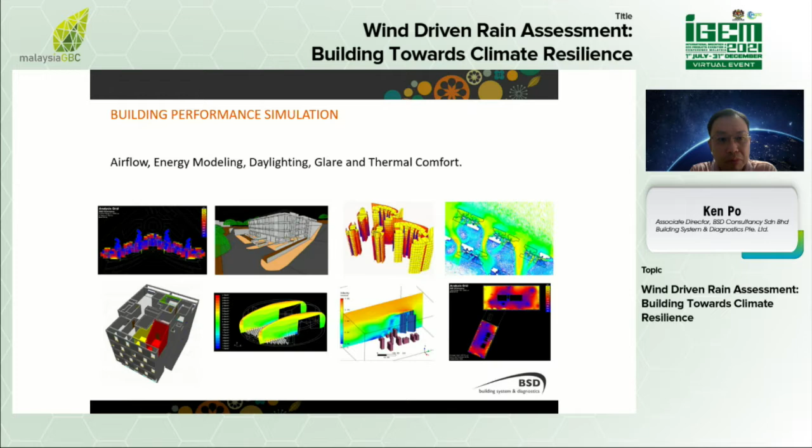Other than green building certifications, we do a lot of building performance simulations, including CFD simulations, energy modeling, daylighting simulations, solar and shadow simulations, etc.

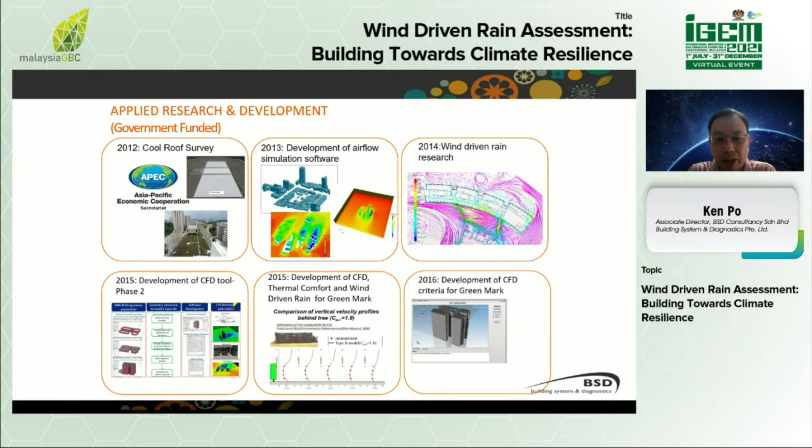Over the years, our company has been actively involved, teaming up with governments to conduct different research projects, such as rooftop gardens in 2007, cool pavement coating in 2008, and working with Singapore Building and Construction Authority BCA to develop CFD simulation methodology, wind-driven rain simulation methodology, and thermal comfort criteria.

We have offices in Kuala Lumpur, Singapore, and Beijing, China.

For buildings, especially sheltered areas, because the area is sheltered, by right, it should remain dry even in the event of raining.

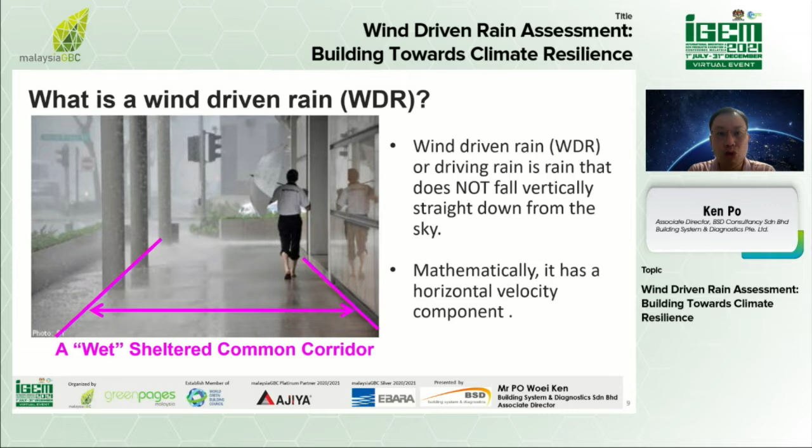Before I start the presentation, I have a few videos that we would like to play. Due to the lag, I have the organizers help me play the videos, and then I will do some explanations. Please help play the video, please.

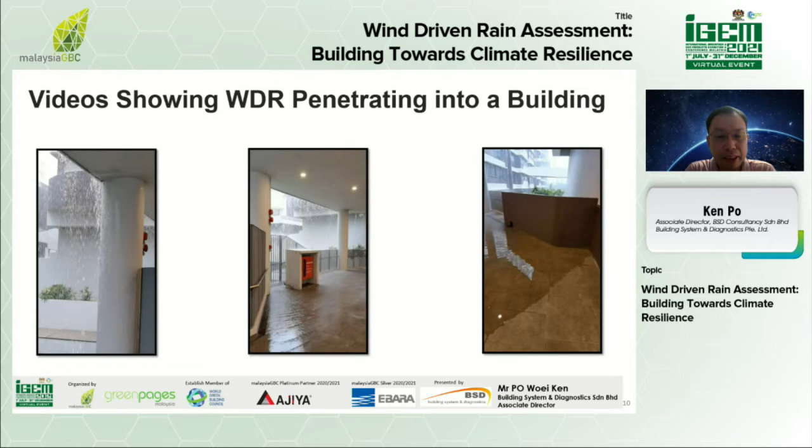I think I'll need to stop sharing. Right. Yes.

Okay, so in this case, you can see that there's rain penetrating into this commercial linkway area.

I think there are a few more videos, please help continue playing that. Okay, so this is another zoomed-in angle. You can see there's a lot of rain penetrating into this area, and gradually there is ponding happening.

Even though at the edges of this sheltered walkway there is a scupper drain, the drain is not sized adequately, and partially it's because there is some blocking of the scupper drains, so the ponding gets more and more serious, right? So these are the three videos I would like to show you guys to illustrate wind-driven rain and how it impacts the building. Okay, let me share my screen again.

Typically the traditional facade treatments that go with a building to protect it from direct rain penetration normally include awnings, retractable awnings, fixed horizontal overhangs, vertical drop panels, or louvers. So these are the typical types of facade elements.

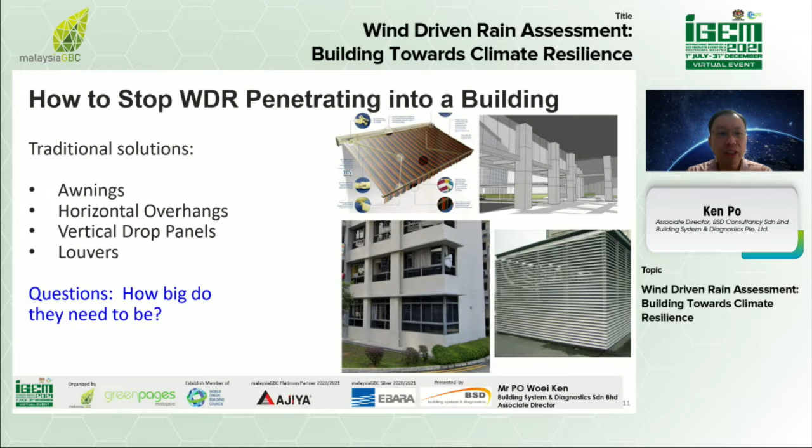Before computer times, in building industries or in built environments, if we wanted to get some sort of airflow or wind flow solution, we would have to do wind tunnel testing. Now for wind-driven rain types of study, that means to really find that out, either we have to build a mock-up, or in wind tunnel testing, we have to spray some water to create a raining environment to find out the rain penetration.

There are very little wind tunnels that would allow you to spray water droplets inside the tunnel. Normally wind tunnels remain dry, and the goal of that wind tunnel is mainly just for wind study, not for rain. It's very expensive to conduct wind tunnel testing. There's not a whole lot of wind tunnel facilities.

In, say, Malaysia or Singapore, probably only a few universities have such wind tunnel models, and they might not even open that up for the public to use or for businesses to do experimental testing. So doing wind tunnel testing is not that feasible.

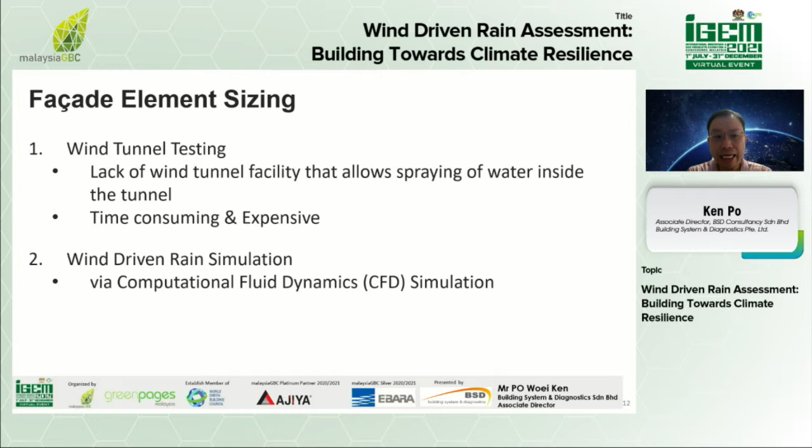So the next best solution to that is to use computational fluid dynamic simulation, or CFD simulation in short, to conduct this wind-driven rain study. And that's primarily the focus of today's talk.

Before I go further, I just want to briefly talk about CFD, computational fluid dynamics. It is actually a branch of fluid mechanics that studies fluids in motion. The first word is computational, so obviously it's computer based—you're using computers to crunch the numbers to find the solutions.

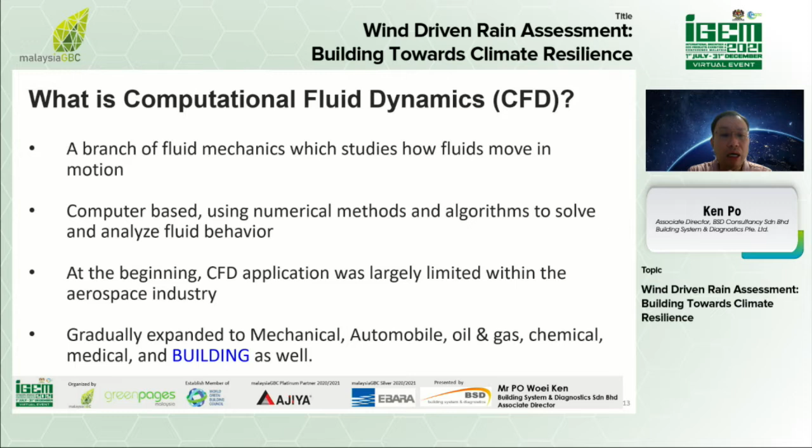At the beginning, CFD was used primarily in the aerospace industry, starting in the 1960s, 70s, used by NASA. NASA has a lot of CFD codes to calculate the aerodynamics of airplanes. Gradually, the use of CFD expanded to other industries, including mechanical, automobiles, oil and gas, chemicals, medical, as well as building industries.

In automobiles, in F1, they run a lot of CFD to optimize those fins and spoilers on the F1 car, so that if you turned the F1 vehicle upside down, it would be able to stick on top of the wall, because there's so much downforce generated by those fins or spoilers on an F1 car. That's why F1 cars can make such a tight turn at such high speed—there's so much downforce, and therefore the tire has enough grip to make such a tight turn.

So there are applications of CFD in the automobile industry, and in oil and gas, for all the pipes where oil is being transported, they also use a lot of CFD to do engineering calculations. In the medical industry, for blood flow inside our blood vessels and so on, nowadays the medical industry uses a lot of CFD to help with the study.

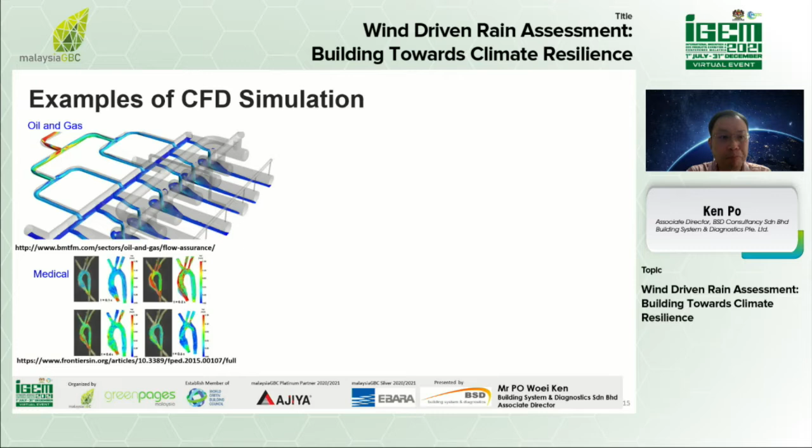So we now come back to building industries. For building industries, we mainly try to use CFD as a tool to find out the motions of wind flow surrounding and inside a building. So the primary outputs we get from any CFD simulations related to buildings would be wind velocity, pressure, and temperature.

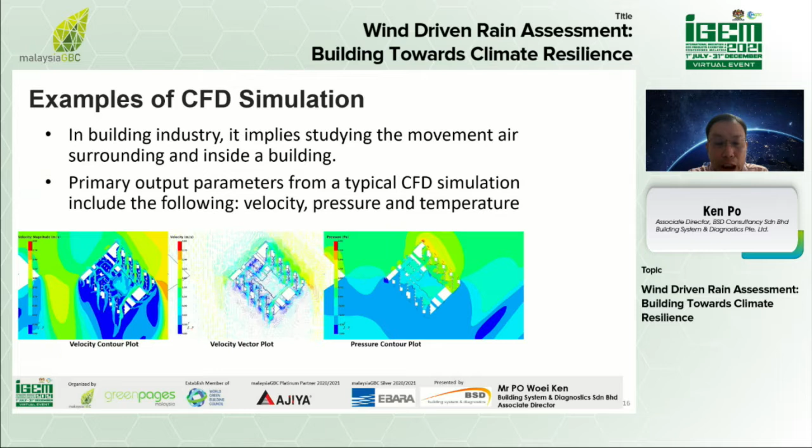It is not to say that CFD is only good for natural ventilation performance calculation. It is not. But in Malaysia and Singapore, in the tropical countries, it is a fact that we use CFD simulations heavily to help improve the natural ventilation performance, or NV performance, of a building, especially if the building is targeting higher green awards, say Green RE Platinum or, in Singapore, Green Mark Platinum. Then it is a prerequisite to conduct CFD simulations to make sure that the natural ventilation performance meets certain passing criteria.

But it is not to say that CFD is only used for natural ventilation applications. We use it for mechanical ventilation study too. For example, one application is the hospital. At the rooftop of a hospital, they will have a lot of exhaust fans, say the exhaust fan coming out from the operating theater or from isolation wards. So the discharge coming through those exhaust fans, we can use CFD to find out if the discharge would or would not recirculate back into the hospital building air intakes. That's why we can use CFD to help us find that out.

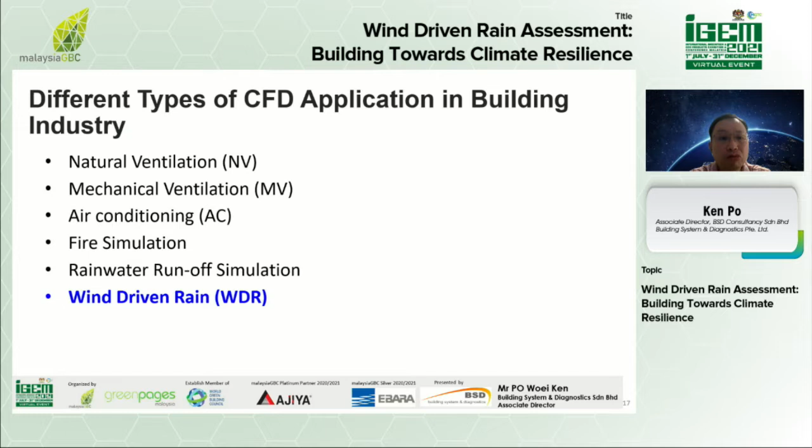For air conditioning CFD, we use that for clean rooms, for pharmaceutical clean rooms, for data centers. There are classic examples of air conditioning CFD simulations. If you are a fire safety engineer, then you would do fire CFD day in and day out, and submit the results to, in Malaysia, the Bomba, or in Singapore, the FSSD, for submissions. Rainwater runoff simulation is something that can also be accounted for. But our main focus today would be primarily on wind-driven rain simulations, WDR, short form WDR.

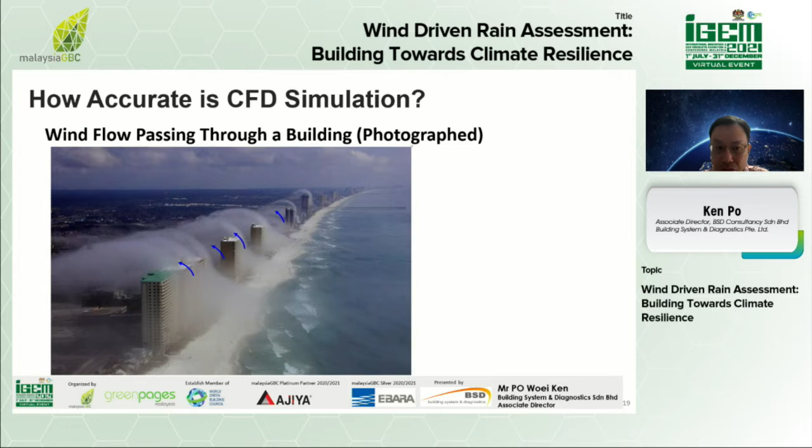Here, the next slide is basically also from the internet. It's a photograph of how the clouds, or the wind, flow past a high-rise building. So you can see that this is very close to the experimental results.

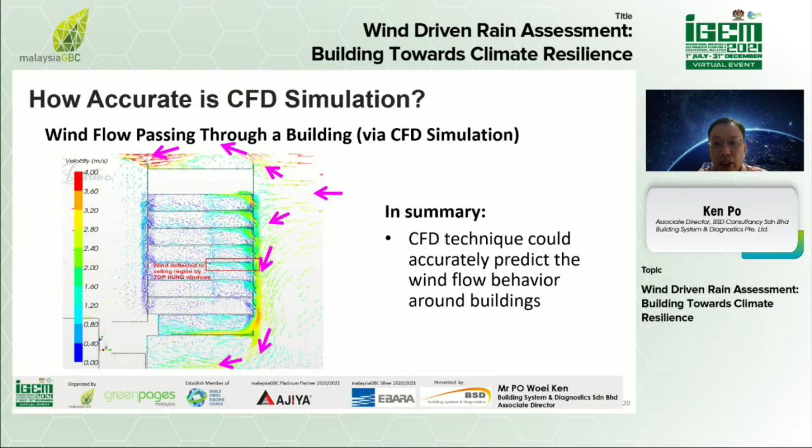Okay, so the objective of this talk today is basically to help quantify the following at the sheltered spaces.

Our focus is mainly on sheltered spaces, because by design if a space is sheltered, there should not be any rain penetration—it should remain dry during raining time. But in the event there is wind-driven rain penetration, using these wind-driven rain simulations we will be able to quantify the depth of penetration.

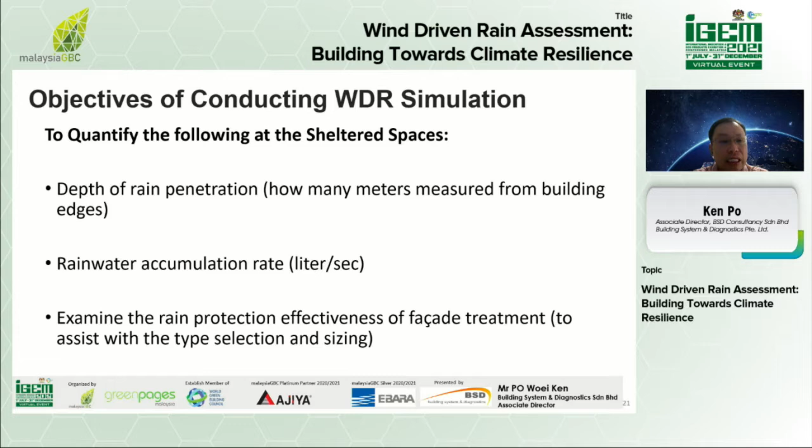From here, we can calculate and estimate the rainwater accumulation rate, which helps with the sizing of the scupper drains or cut-off drains. We can also look into cases where your base design does not produce satisfactory results and you want to incorporate certain facade elements. Using wind-driven rain simulations, I can examine the rain protection effectiveness to see whether there is a reduction in penetration depths, so on and so forth.

All right, so here I'll talk briefly about the methodology that goes into a typical wind-driven rain simulation.

Say I have a set of buildings—that's my main development—located in certain areas with surrounding buildings. Whether it's a natural ventilation CFD simulation or a wind-driven rain simulation, because we are modeling the oncoming natural wind, we have to account for the presence of existing surrounding buildings. So in the 3D CAD geometry, we are not just generating the 3D CAD model of your own development, but also accounting for the presence of surrounding buildings.

Step number two is for typical wind-driven rain simulations: you have to basically first run the natural ventilation simulations, the one I talked about. You have wind coming in from certain directions at a certain wind speed, and that wind speed is expressed as a return period. So I'm introducing this term called return period.

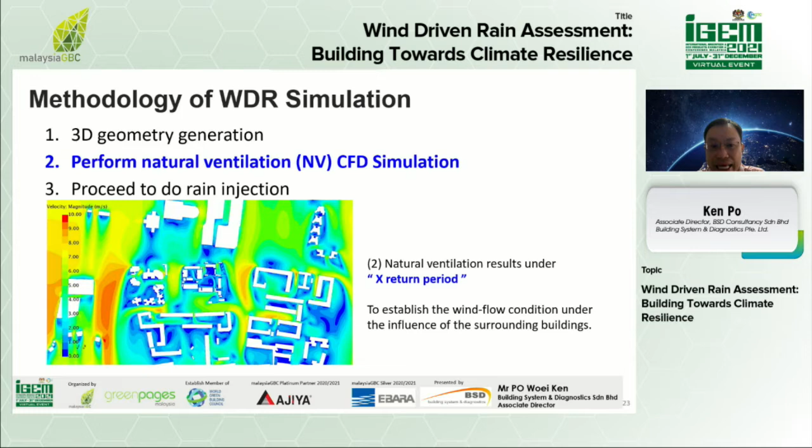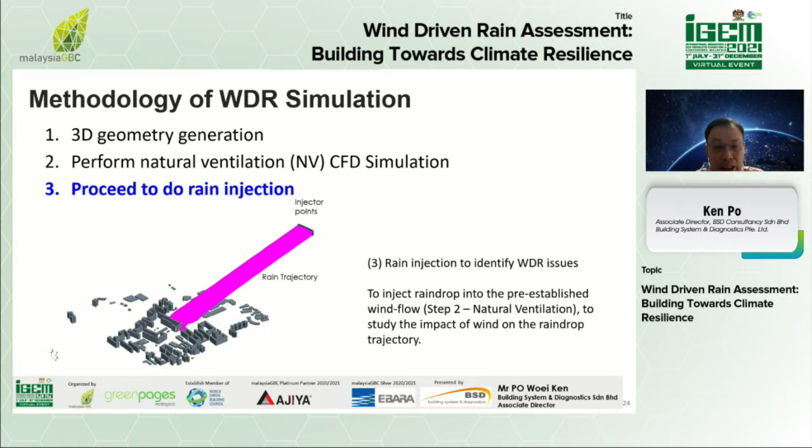So from here, once we get these NV simulation results, we can then go to step 3: injecting the raindrops. From an established natural ventilation simulation result, we will then manually inject a bunch of raindrops so that they fall right on the buildings we are analyzing. We don't really care if the raindrops fall on other surrounding buildings, because that's not our area of concern—we mainly focus on the raindrops falling right on top of our buildings of interest.

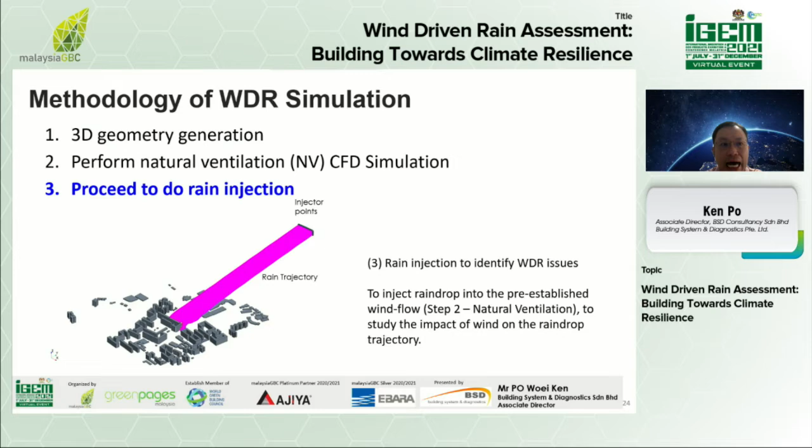So in a few slides these are the basic methodologies introduced at a high level. Then I'll go into the more detailed aspects of that.

So you might ask, okay, we have to account for the presence of surrounding buildings, I got that, but what is the extent of size you have to account for? Using this as an example, in the middle is a private condominium development. If I draw a line connecting the longest distance across this particular development, say the reference length is 168 meters as an example, then the presence of surrounding buildings, based on the current GreenRE CFD simulation methodology, has a radius of 3 times the reference length. So the diameter would be 6 times the reference length, and that's about 1 kilometer.

So this diameter is about 1 kilometer in size, and that is the extent of surrounding buildings that you would need to account for. By doing that, the simulation results can be considered accurate and realistic. So in summary, the radius is 3 times the reference length.

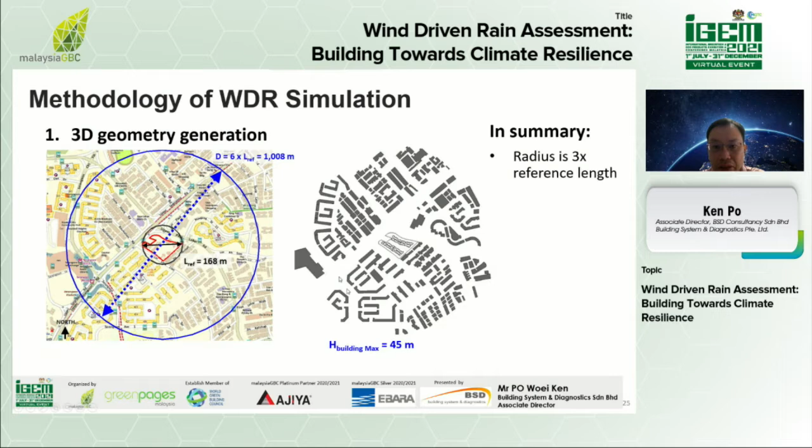This shows that right in the middle is the development. So we can either include surrounding buildings 3 times the reference length, or we can include the presence of surrounding buildings 500 meters north, south, east, and west. This 500-meter extension is in the Singapore Green Mark standard. So based on the location of the project, and based on different criteria, you can adopt either the 3-times reference length or the 500-meter extension.

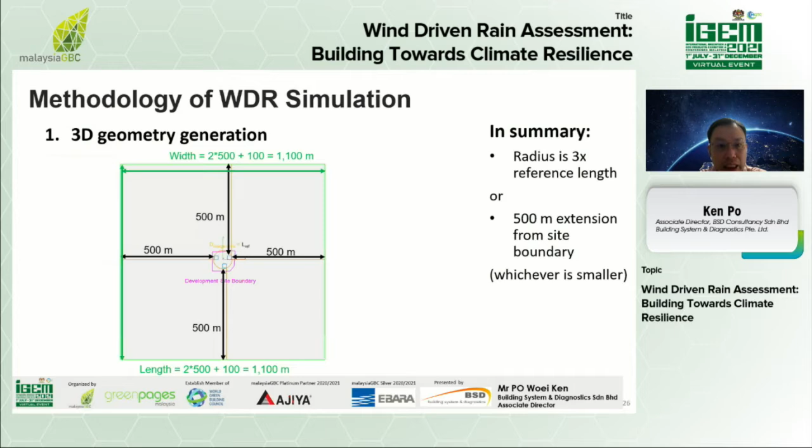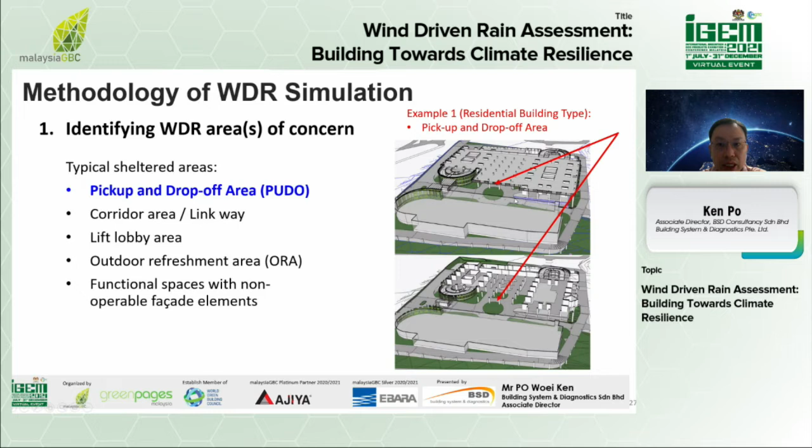Basically, in Malaysia, there are lots of condominiums that on level 1, or ground level as it's called in Malaysia, have the pick-up and drop areas. Then you have a few stories of multi-story car parks, and your residential blocks are located on top of these car parks. So this pick-up and drop area, or PUDO area, is typically an area of focus for wind-driven rain study.

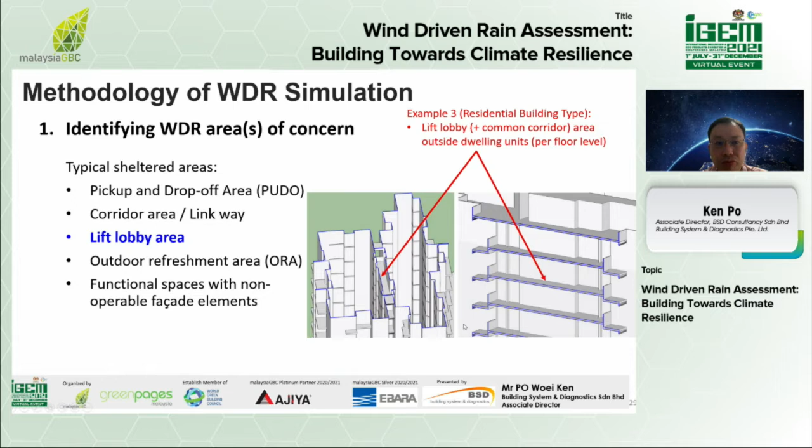So it's not stuffy, which is very good for normal day situations. But in wind-driven rain situations, we need to make sure the facade elements are adequate. For example, in these cases there is a horizontal RC canopy, and on the outer edge of that canopy there are vertical louvers. We need to check whether these combinations of facade treatments give good enough protection to this lift lobby area.

For commercial buildings, say with some outdoor refreshment area, like Starbucks or those kinds of dining areas, it is sheltered definitely. Those with outdoor refreshment areas are sheltered, but because they're located very close to the edge of the building, during raining time, would rain penetrate or hit those ORA areas or not? So this is another example on the commercial building types.

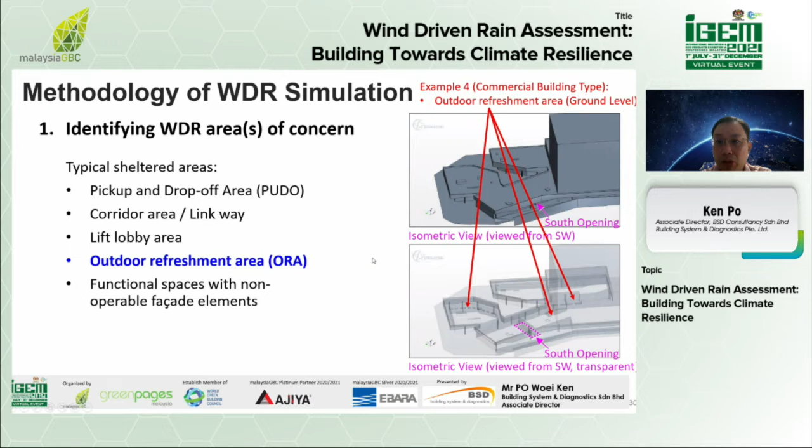Lastly, for an industrial building, say a naturally ventilated industrial building type, inside my production areas or functional space, these industrial buildings have fixed, non-operable facade elements. It might feature either a single bank louver or a double bank louver, so it's not operable, it's fixed. Then the next question is, would rain penetrate into my production area?

So you can see that in all these different areas of concern, I did not mention anything about residential dwelling units. First of all, residential dwelling units feature operable facades and windows, either casement, sliding, top hung, or conventional louvered windows, so they are operable. Secondly, because they're operable, the tenants or people staying in the dwelling units, during raining times, will go to the windows and close them up to make sure rain doesn't penetrate. So all five typical areas of concern that I've highlighted deal with something that is fixed, facade treatments or elements that are all fixed.

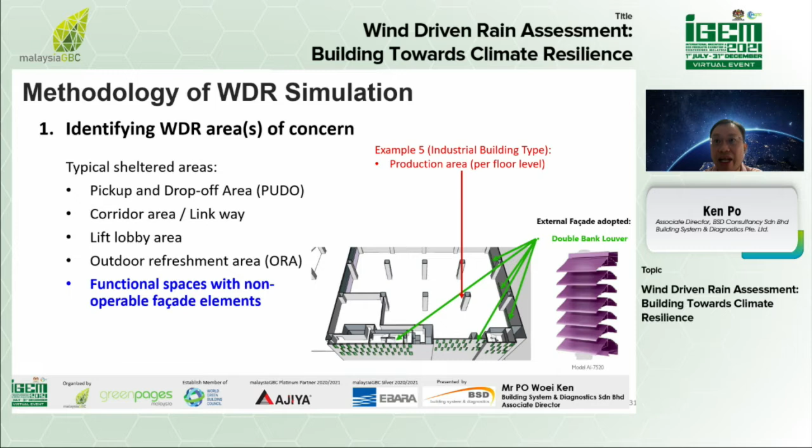So you cannot really improve the rain protection effectiveness. Realistically, a wind-driven rain simulation is more applicable to those areas that have fixed facade elements. If you do have an active system, say at the switch of a button the louver angles can be adjusted, or the windows can be mechanically controlled to close at the push of a button, then an active system would be the best solution. If you do have an active system installed or provisioned, then you are right, you do not need to conduct wind-driven rain simulations. The primary reason we do this simulation is because most buildings would not have such an expensive active system.

Okay, so the next thing is, after identifying the areas of concern, the next question is what wind directions and what wind speed magnitudes you are going to prescribe in your simulations. For Malaysia, in Kuala Lumpur as an example, depending on your location in the Klang Valley, you would either choose the Subang Airport weather data or the KLIA weather data. If you have a project in PJ, Subang, or even in downtown KL area, say Bukit Bintang, Subang Airport is actually located closer compared to KLIA.

And therefore, you should always choose the nearest airport. So this is what we call a wind rose. I break it down into 12 different months, starting from January all the way to December. So what it says is a wind rose gives us an indication of the prevailing wind directions per month.

In January, you can see most of the winds are coming in from the northwest direction. So northwest, west towards northwest, is primarily the prevailing wind recorded at Subang Airport from January, February, March, all the way to May. In June, we have more south-southeast or southeast winds coming up, that's in June, July, August, and September. Then in September, we have more northwest wind coming back, September, October, November, and December again.

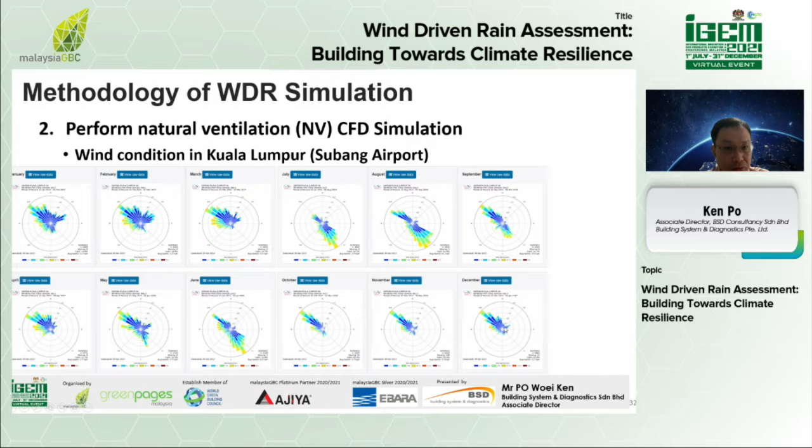So in summary, if we were to plot an annual wind rose of Subang airport, we can basically conclude the prevailing wind direction is northwest with an annual hourly mean wind speed of 2.09 meters per second. That can be calculated. This is based on a 5-year sample, January 2012 to December 31st, 2016. So it's 5 full years of data.

And the next second most predominant wind direction would be the south-southeast or south wind with an annual mean wind speed of 2.65 meters per second. So if you were to conduct natural ventilation simulations or wind-driven rain simulations for your projects in KL or PJ area, I would strongly advise using Subang Airport data.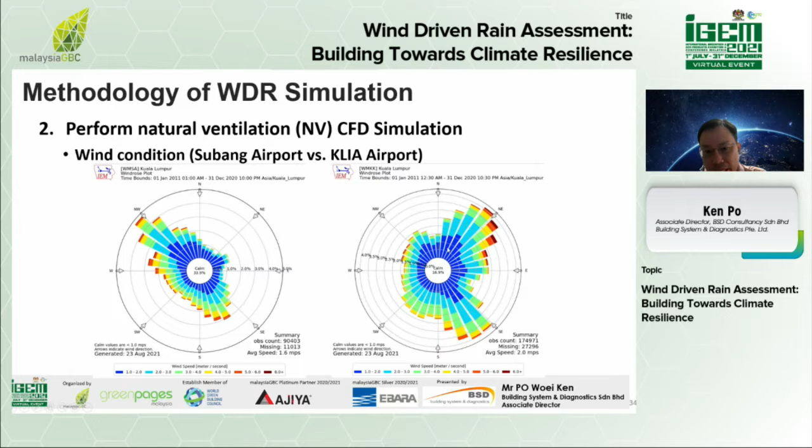Then if you were to have a project, say at Cyberjaya or Putrajaya nearer to KLIA, yes, then you would use the KLIA wind rose data. This one is on the right hand side. So you can see that KLIA versus Subang airport, probably the distance between them is 50-60 kilometers apart. But you can see the wind rose is completely different. For KLIA, the predominant winds are northeast and southeast, versus for Subang Airport it's northwest and south-southeast.

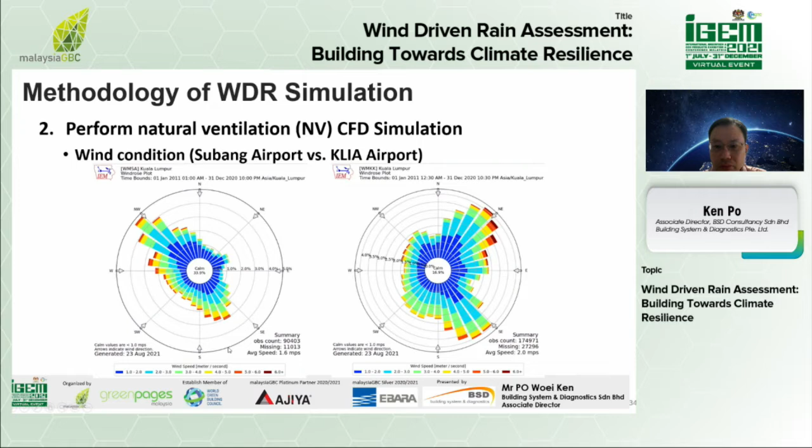So depending on your project site, say at Bukit Pindang area, it's only 20 kilometers away from Subang airport. Well, if you compare that to KLIA, that is about 45 kilometers away. So you will pick the nearest airport. That should be the way to go. And we will always pick an airport wind data.

For different buildings, before I continue further, for different cities in Malaysia, say in Penang, say in JB, say in Kuantan or Kota Kinabalu, KK, you would use the local airport wind data. That would be the best and most accurate way to do the simulations.

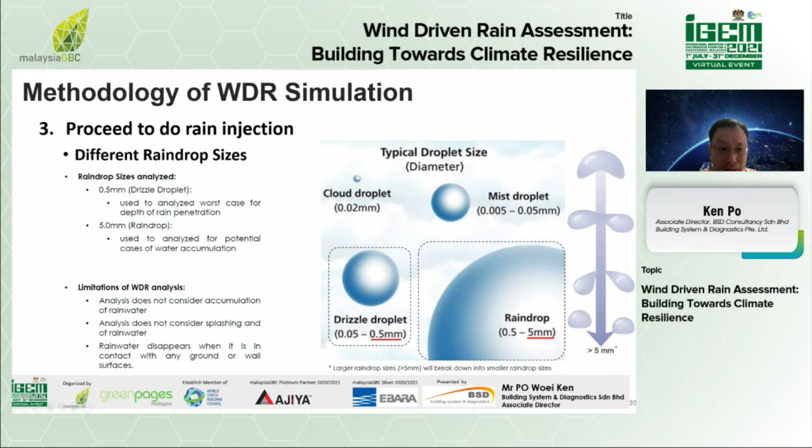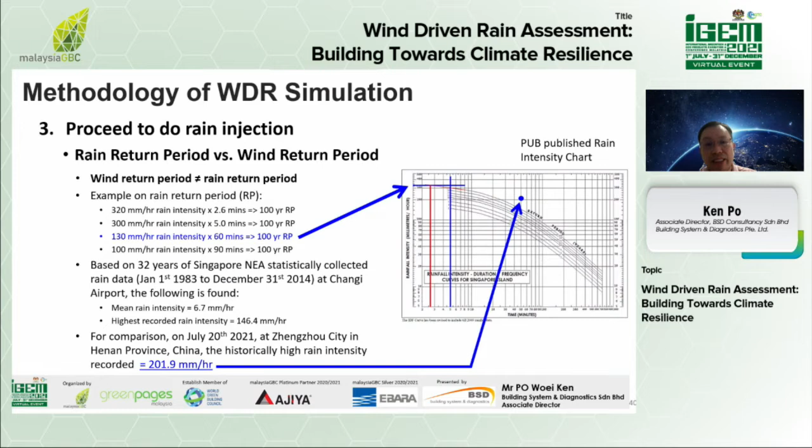So to them, this July 20th rain, that is why the news agencies all call it a 1,000-year return period condition, right? So that gives us an idea how severe that incident really was.

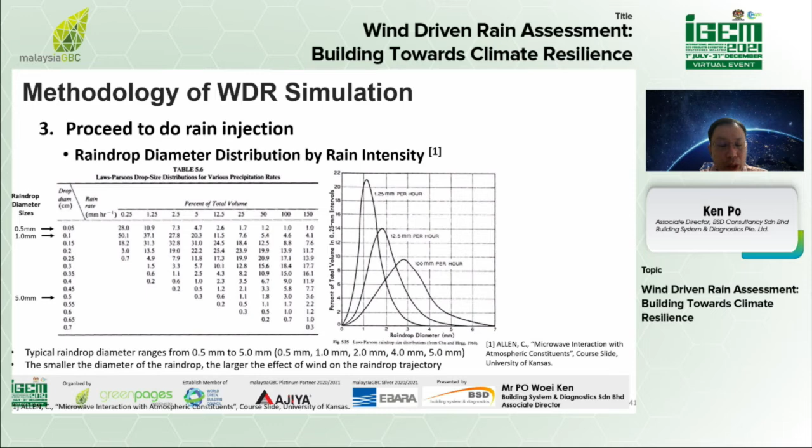I will quickly talk about the passing criteria, or the human perceptions on wind-driven rain results. Now, just now I talked about earlier on that BSD was involved in these research programs funded by the Building Construction Authority of Singapore.

In 2005, that joint multi-party research project aimed to develop natural ventilation CFD simulation methodologies by IHPC of Singapore, thermal comfort criteria by National University of Singapore, and BSD worked on the wind-driven rain simulation methodology guideline and criteria, together with the Eindhoven University of Technology, TUE, from the Netherlands.

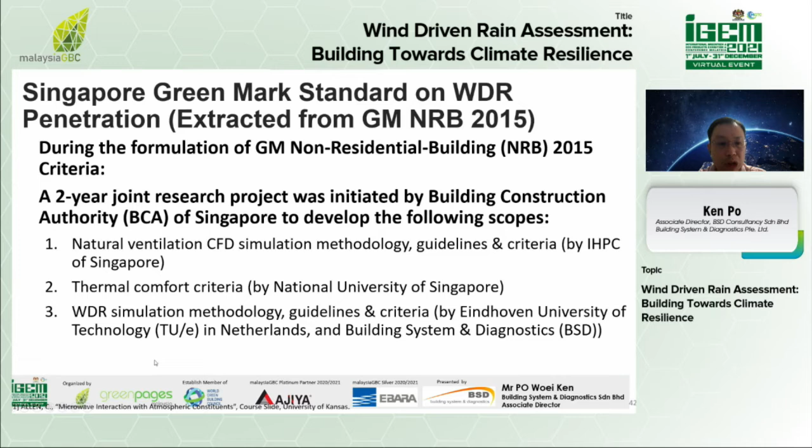So at the end of this 2-year research project, item 3 is what gives the passing criteria of the wind-driven rain study. It focused on different types of non-residential buildings: industrial buildings, healthcare buildings, commercial atriums, hawker centers, sports facilities, and schools—meaning primary and secondary schools primarily, with natural ventilation classrooms.

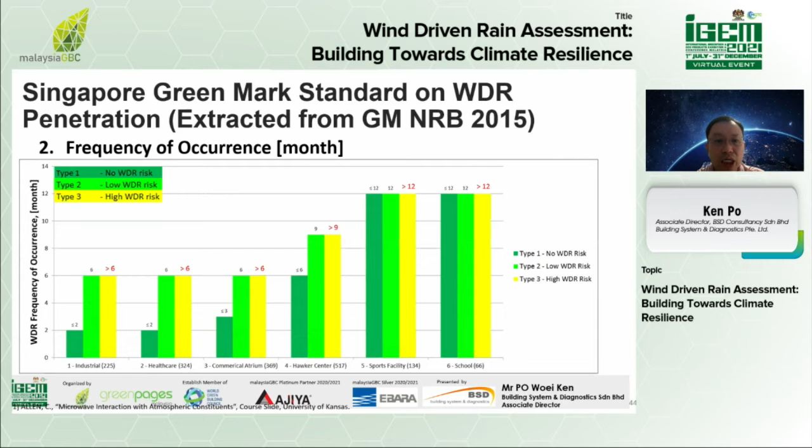Then the frequency of occurrence, you can treat that as the input parameters you will put into your wind-driven rain simulations. Just now we talked about a 12-month return period. For certain different types of buildings, you can use anything greater than a 6-month return period, or for certain facilities it's a 12-month return period, something like that. So the results of that study give us two big results: one is the passing criteria, the other is the input parameters into the wind-driven rain study.

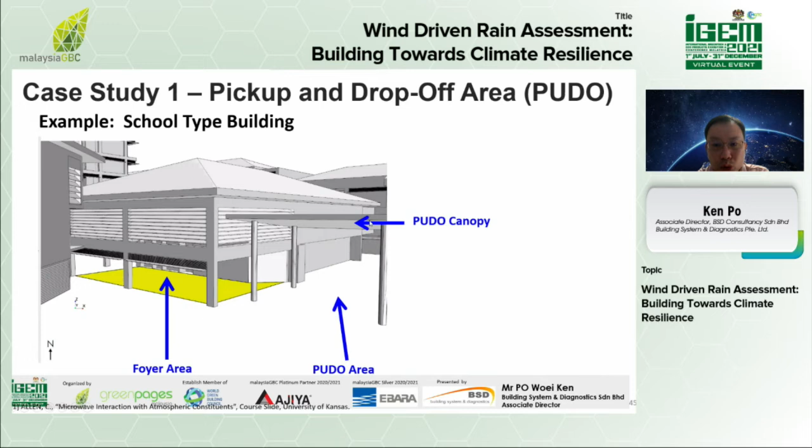I'll give a few case studies on what you can get out from this wind-driven rain simulation. So just now I talked about the Pudo area—I'm going to use these school buildings. That school building has a Pudo area and foyer areas, and you can see that this Pudo canopy is a double volume height.

So we will first do a natural ventilation CFD, and this is the velocity contour plot I talked about just now—dark blue stands for low wind speed. In these 8 different wind directions that we analyze, you can see that under east winds, we have a lot of wind rushing inwards into this foyer area and also the Pudo area, so potentially this would mean there are lots of rain penetrations.

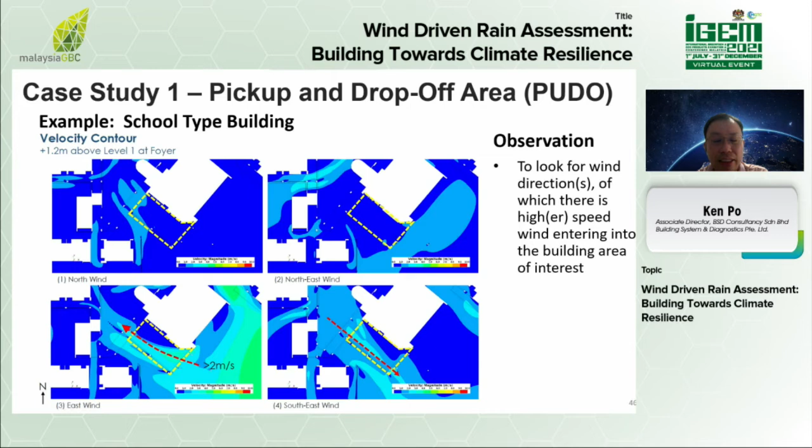And this is for the smallest raindrops, 0.5 millimeter in size. If we go to the largest raindrop sizes, then the penetration depth is very little into the PUDO area. Most likely it's considered acceptable, and there isn't anything into the foyer area.

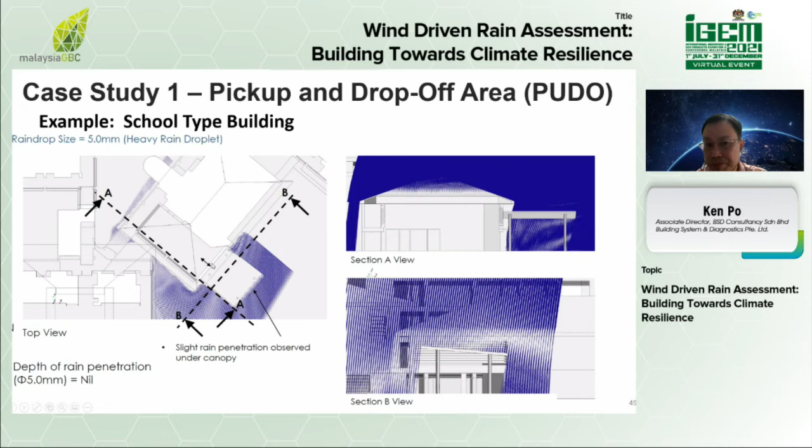Right, for the school, same project, case study 2, focusing on the Linkway area on the right-hand side. If we do a section CC at the Linkway, you can see that at the higher floor levels, typically for school buildings with multi-floor levels, where the wind is stronger, there's a likelihood of wind-driven rain penetration at 31 degrees and 51 degrees penetration angles.

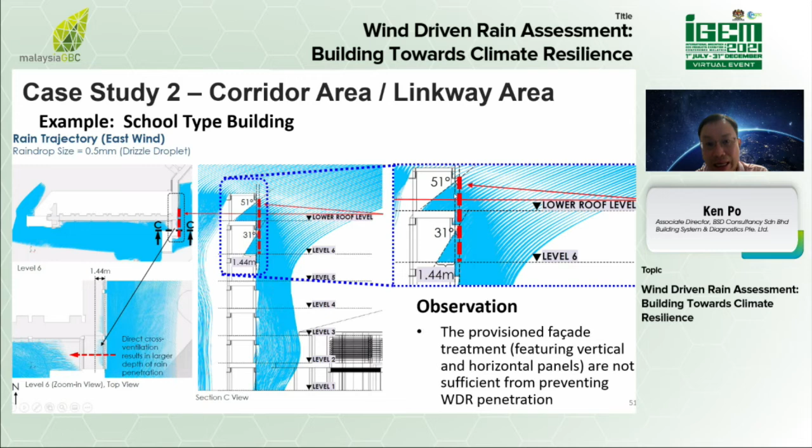So at this lower roof level, pretty much the entire width of this Linkway is wetted, and obviously that is a no-no. If I run this and get this kind of simulation result, this is not considered acceptable to me. Then I would advise the architects that the facade treatments need to be enlarged to give more protection.

Right, for high-rise residentials, for a lift lobby corridor area, at the highest few levels, normally that's where the wind is strongest and you have rain penetration inwards. So this gives us an example. At the highest level, that would always be the most critical floor level with rain coming in.

You can see this rain from the 0.5 millimeter raindrops is actually traveling upwards. So now we are tying this back to the velocity contour vector plots we showed, that near the highest part of the buildings, the wind is traveling at an upward angle, and that is why the rain, especially the very small raindrop size, is also traveling at an upward angle, and it will penetrate into this common corridor lift area, where the penetration depth is very severe at about 9 meters.

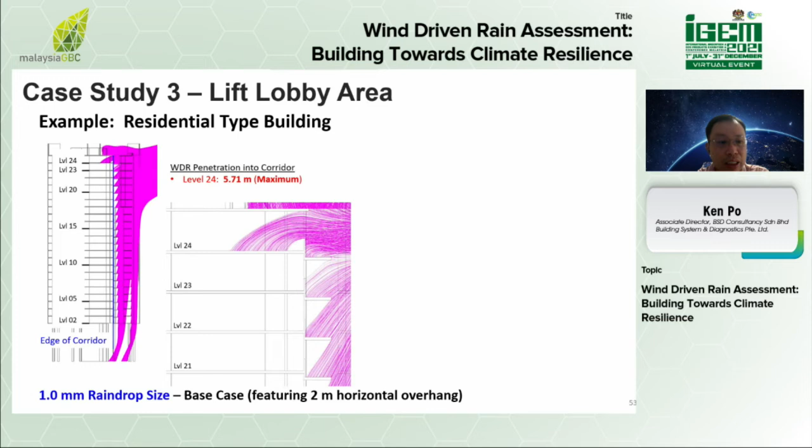Then at lower floor levels, penetration depth is less, and at certain floor levels and below, there is no penetration depth. So this is the kind of result we can get out. For larger raindrops, the penetration depth is less. So this is the kind of result we are getting out from the wind-driven rain simulations applicable to residential tower blocks.

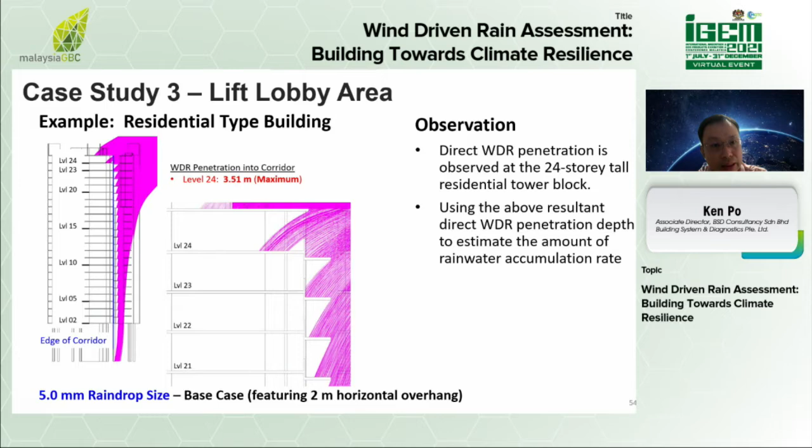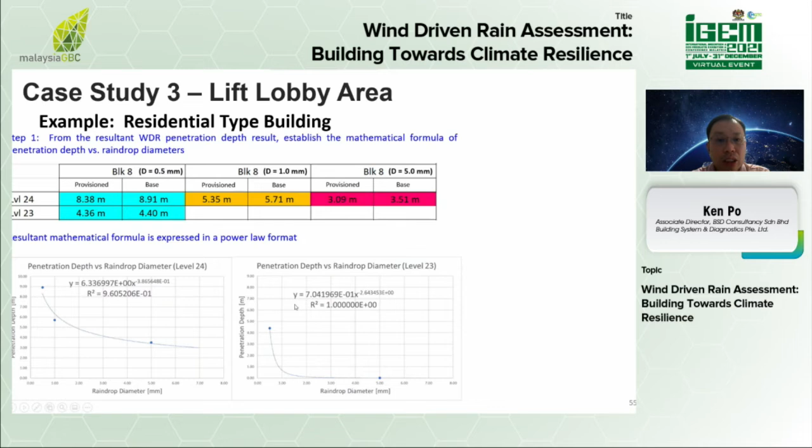So from here, from the penetration depths, using the raindrop distributions based on rain intensity, we will be able to figure out, say, at level 24 and 23, we have significant penetration depths from the 1 millimeter raindrops and 5 millimeter raindrops. So we can mathematically estimate using all this information I talked about previously.

To calculate the final values, rain accumulation rates, say in liters per minute or liters per second, that is the amount of rainwater accumulation rate. So from here, that would help with the sizing of the scupper drains and putting in some gradients on the floor surface to make sure the water that does come in will flow towards the scupper drains, and to incorporate slip-resistant surfaces, applying slip-resistant materials to the surface.

To make sure the lift door, typically the solution is for the lift door to be slightly raised, elevated to prevent rainwater flowing into the lift core, because we know that after construction, probably the constructed floor surface gradient is not that perfect, so maybe the accumulated water will flow towards the lift core, and obviously that is a big no-no.

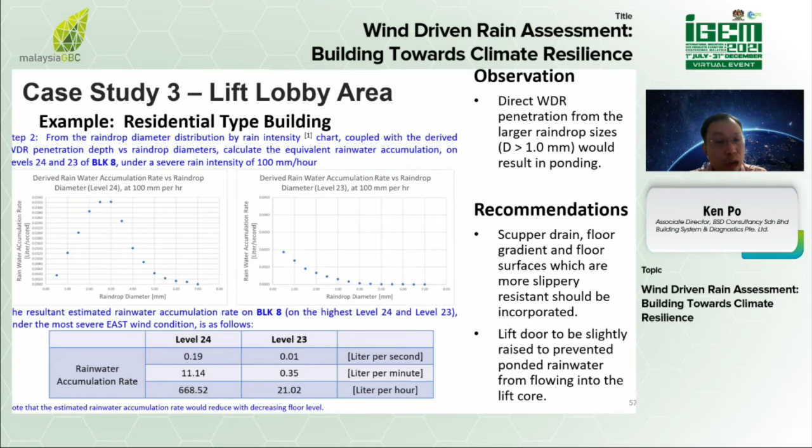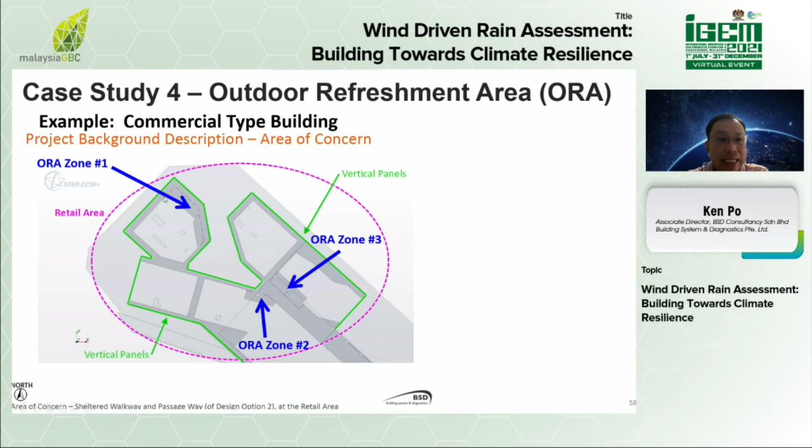Right, so another example is that outdoor refreshment area I talked about. I have 3 ORA zones located near the ground level of these commercial buildings. And then the green colors are the vertical panels. Right, so you can see that the wind rushes in, and this is the penetration depth.

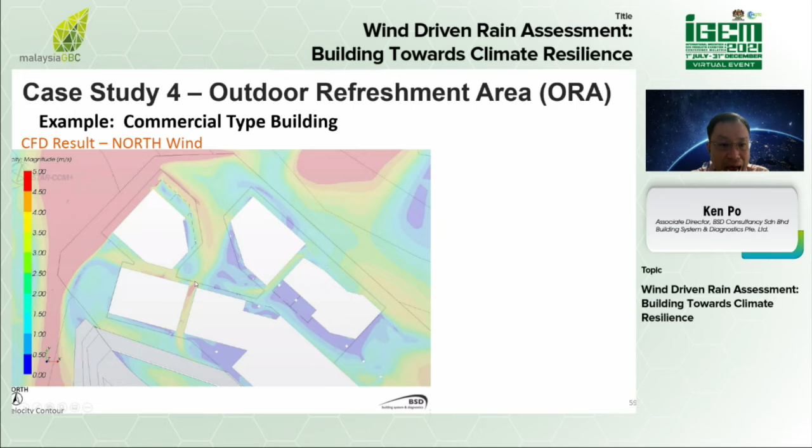So for certain areas, you can see where my cursor is pointing, there is a small gap and the wind is allowed to flow through. So because of a very high wind speed flowing into this gap, there is rain coming in. If there is no wind going into the building, then there is no rain penetration.

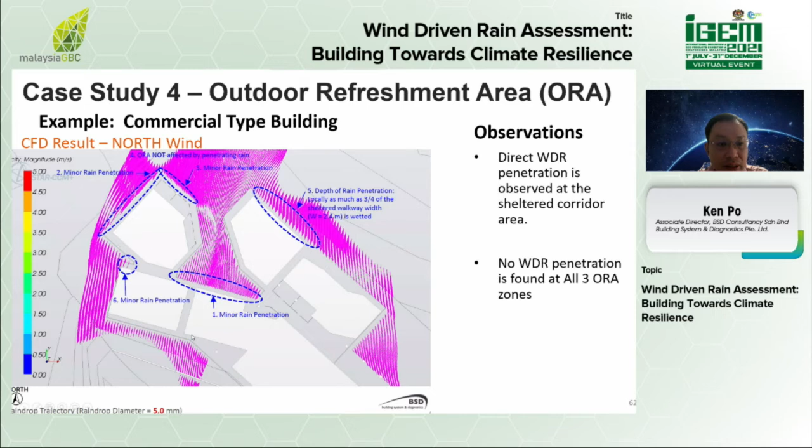Right, so from here, coupling the wind speed result with the rain results, we can basically conclude that certain common corridor areas will have some rain penetration, but the 3 ORA areas would remain dry, basically. So to the developer, this kind of result is considered acceptable. They just need to make sure that the floor surface, the gradients of this common corridor, is slightly sloped outwards so that whatever water comes in will flow away from the buildings and not into these particular gaps.

Right, the last case study—just now I talked about the industrial buildings with the fixed facade. So some might have single bank louvers, some will have double bank louvers.

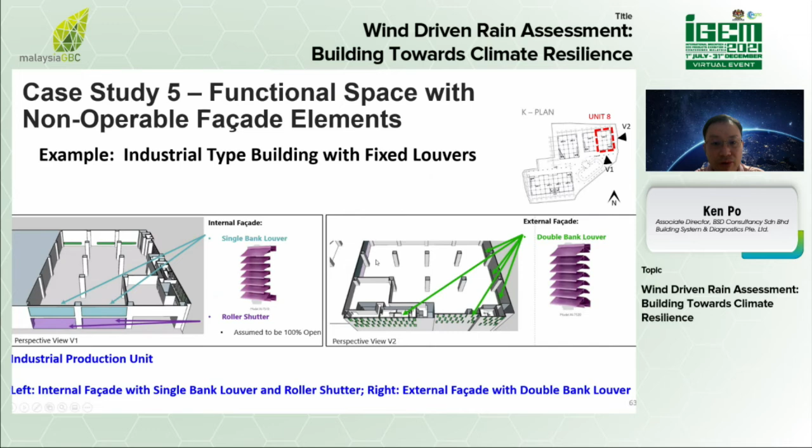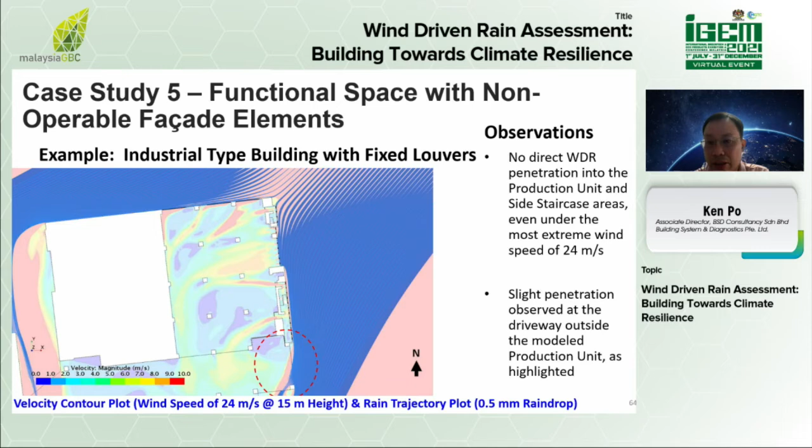But even with such strong winds, with the double bank louvers, there is no rain penetration into the production area. Then on the outside driveway area, because it does not have a double bank louver—it only has a parapet wall—then obviously, yes, rain will come in. That's understandable.

Okay, so with that, I end my presentation. We can go to the Q&A session. If everyone has any questions, you can raise it up. I'll try to answer them to the best of my ability.